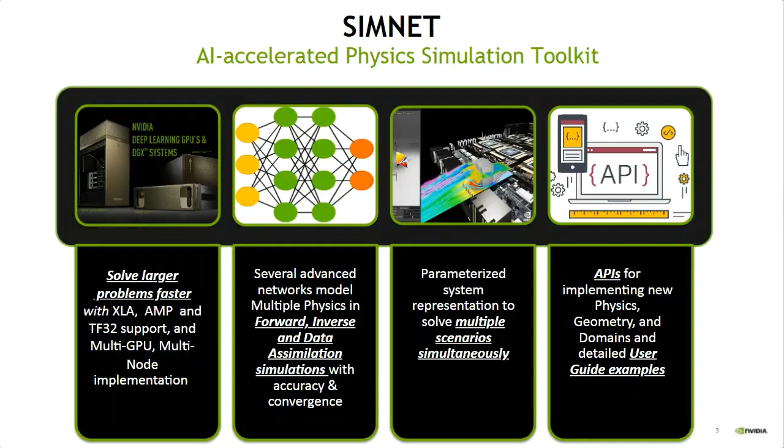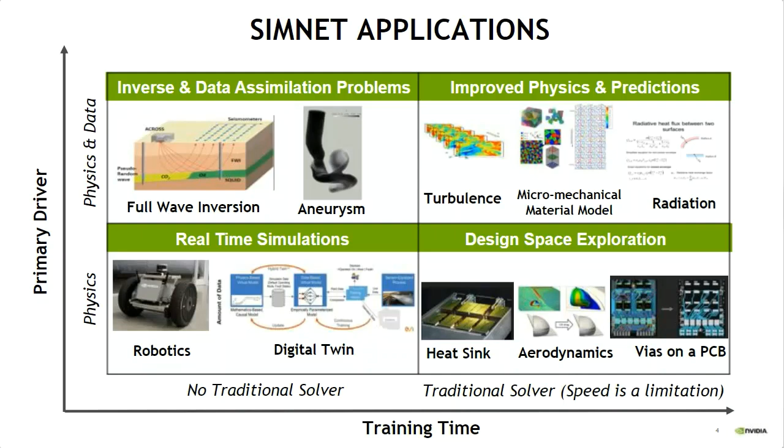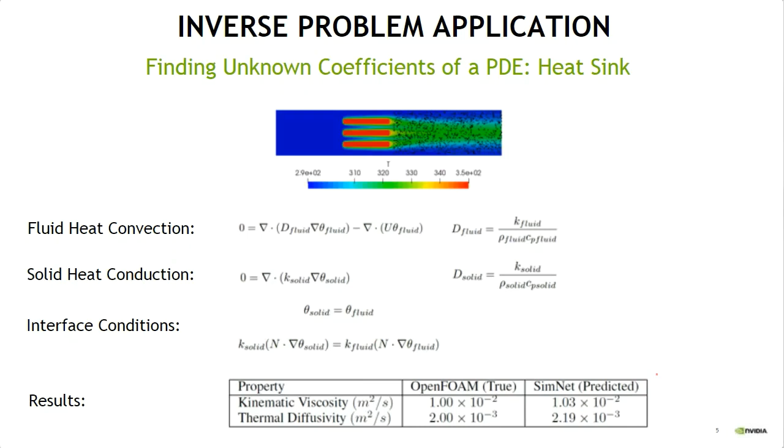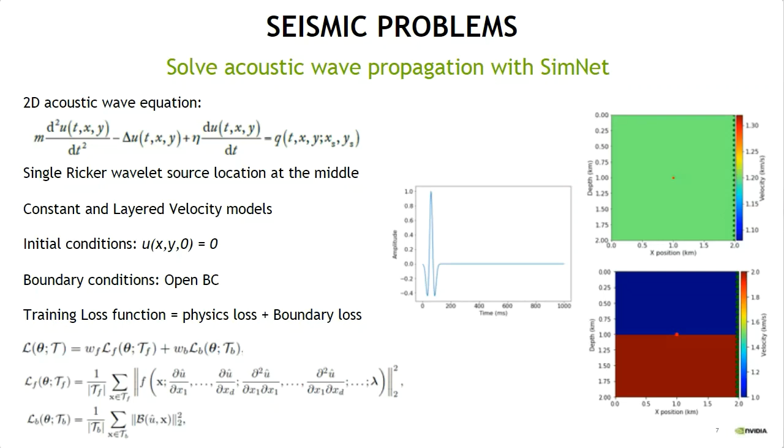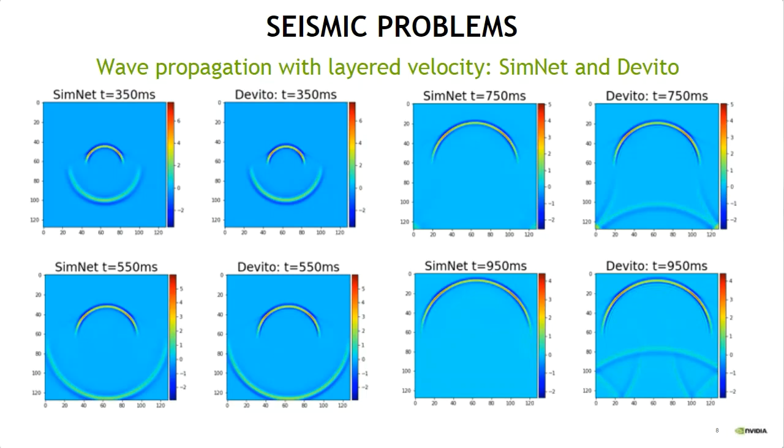For the layered velocity model, not only do the SimNet results compare well with the Devito solution at times 350 and 550 milliseconds, but also they do not show the reflection found in Devito results, which are unphysical and inconsistent with the imposed boundary conditions.

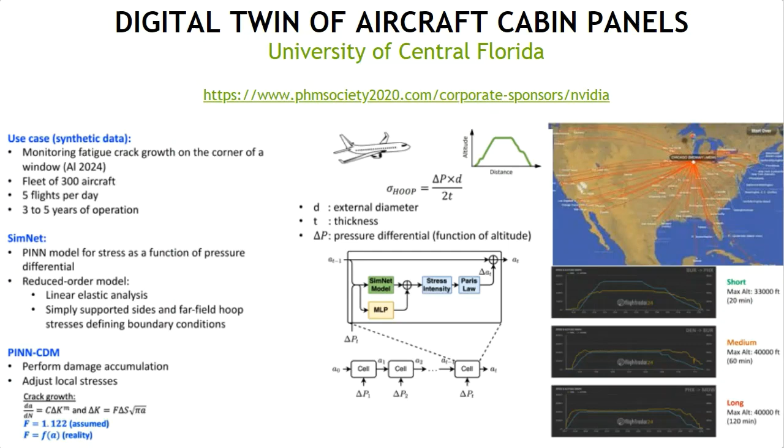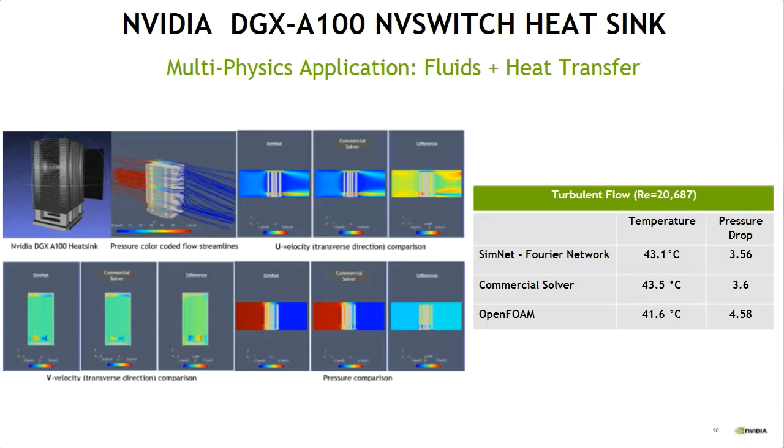Comparison of SimNet results for the pressure and velocity contours, as well as pressure drop and maximum temperature at the heat source, shows a good agreement with both OpenFOAM as well as the commercial electronic cooling software. SimNet trains on a parameterized geometry with multiple design variables in a single training run, thereby significantly accelerating design space exploration. In contrast, traditional solvers are limited to a single geometry simulation.

Once the training is complete, several geometry, material, or physical parameter combinations can be evaluated using inference as a post-processing step without solving the forward problem again. Such throughput enables more efficient design space exploration tasks for complex systems in science and engineering.

The neural network in this example consists of 10 variables with min, max, and median values in the range of these parameters. The OpenFOAM and commercial solver runs are on 12 CPU cores, dual 3.4 GHz Intel Xeon Gold, and SimNet runs on 8 V100 GPUs in the DGX-1. It can be seen that SimNet can solve the problem faster than the traditional solver by several orders of magnitude.

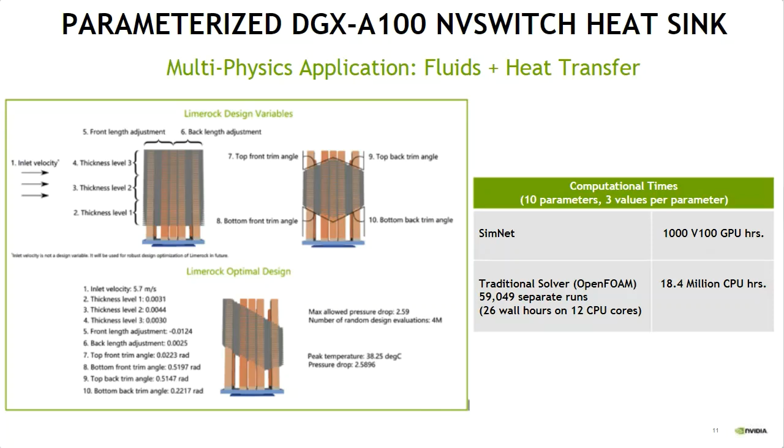Using FP32 precision, the A100 is about 1.5 times faster than the V100, but the speedup is over 3 when using TF32 precision. For parallel runs, both strong as well as weak scaling have been optimized.

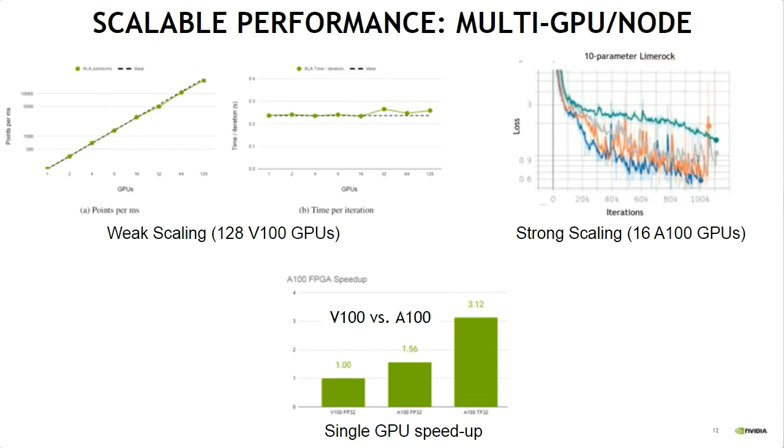All right, so SIMNET is designed to be a general purpose neural network differential equation solver. So what I'm going to talk about is some of the details behind what a neural network solver is. This is oftentimes referred to as physics-informed neural networks. And after that, I'm going to go over some of the key features of SIMNET that we hope will get people interested in it. And so I'm going to talk about the methodology of neural network solver in this very simple example problem of solving this differential equation.

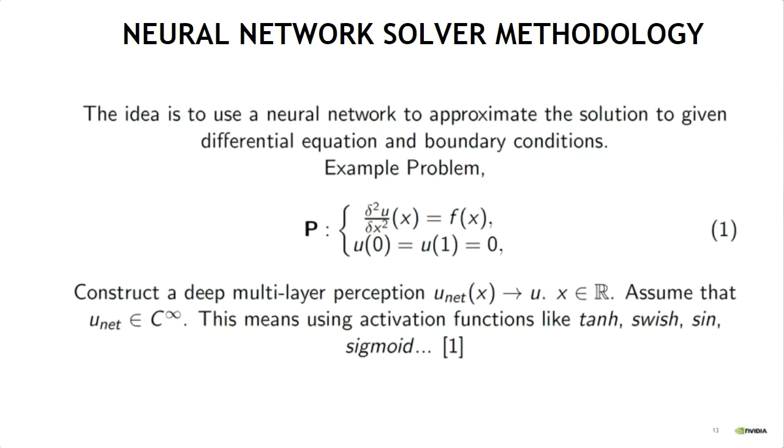So we have this differential equation we're trying to solve, and we have these two boundaries. And so we're going to construct a deep multi-layer perceptron neural network that's going to map this single value x to a value u. We're going to train this neural network so that it represents the solution to this differential equation. We're also going to construct this neural network with activation functions like tanh and swish so that the neural network is continuously differentiable. And I'll show why we need that in the next slide.

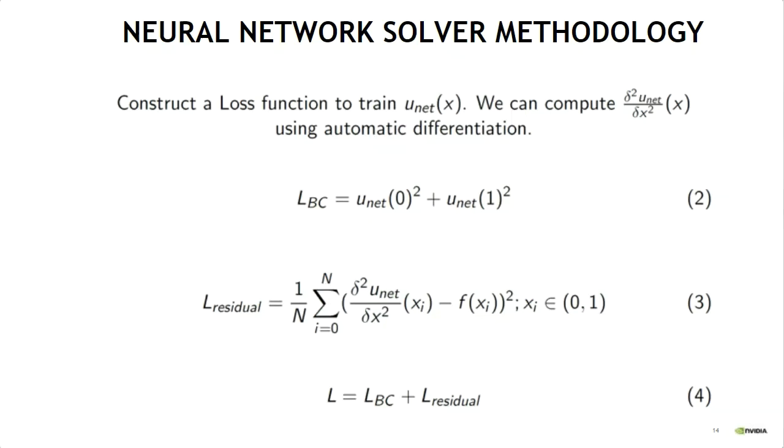We're going to add these losses together, and we're going to minimize this loss as much as possible. And if the neural network has minimized this loss sufficiently, the neural network itself will be our solution to the differential equation. And I'll note that we can compute these derivatives in this equation and the second order derivatives using automatic differentiation that's available in most neural network libraries today. All right, so this is just a very simple example. If we set the function f to be just 1, then we can use our neural network solver, and it solves it very well for this very simple problem.

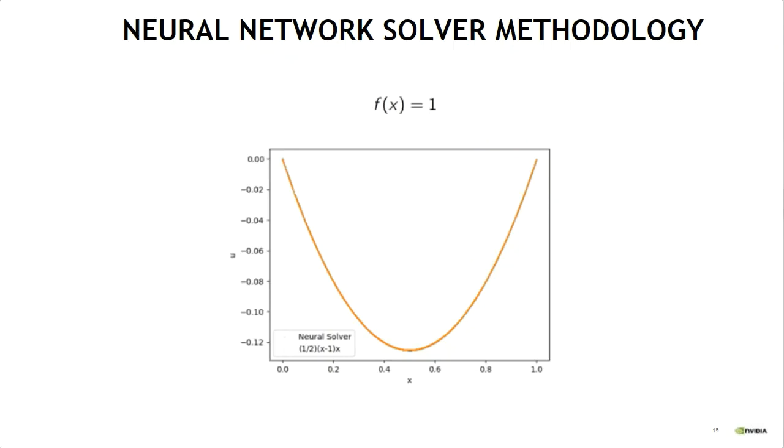There's some differences. This will scale the losses proportional to the area. This is actually kind of nice because it keeps things consistent across different problems. It also allows us to compute these integrals more efficiently with things like quasi-Monte Carlo sampling or sampling in certain regions with a higher frequency. But I bring this up because for the rest of the slides, I'll be showing this integral and the losses. All right.

So one of the key benefits of a neural network solver is being able to solve parameterized differential equations. And so I'm going to go over a really simple example of this with our previous example. So we're going to have the same differential equation we're trying to solve, but now we've parameterized the right boundary condition with this value L.

And we want to know the solution to this differential equation where we're varying this right boundary between 1 and 2. And so how we're going to do this is we're going to train a neural network. Before, the neural network was taking in that single value x and mapping it to u; now it's going to take in 2 values, x and L, and then it's going to map it onto u.

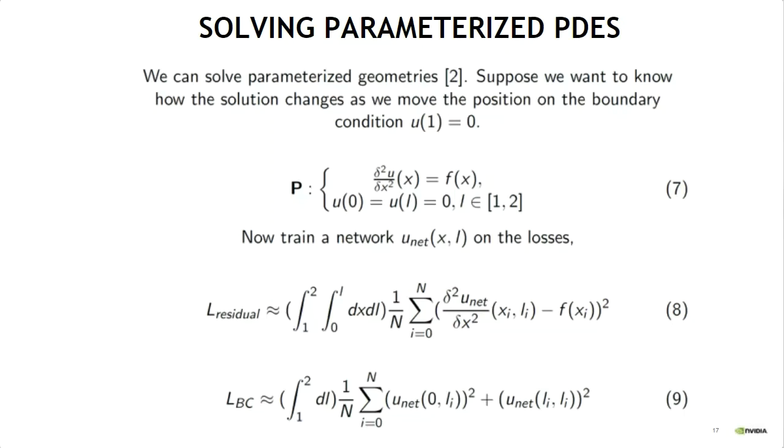So while this is a really simple example problem to illustrate how a neural network solver can solve parameterized problems, you can start to imagine how this can be a really powerful tool for a lot of different problems. You can solve parameterized partial differential equations, or in a lot of the examples that we have in our user guide, we're solving parameterized heat sinks, where we're varying the heat sink geometry in some ways, or the inlet speed of the channel and things like that.

So we can also solve inverse problems with the neural network solver. And so I'm going to go through an example of this. So suppose we have that same problem before, but now we have 100 random points between 0 and 1 where we know the true solution for u. So we know u true at 100 random points, and we want to determine the function f that is causing this solution to our differential equation.

So what we can do is we can train a neural network UNet like before, and we can also add in another neural network FNet, and FNet is going to approximate this function that we're trying to find out. We're trying to invert out this function. So like before, we're going to set up this loss function for the residual, and now f is coming from our FNet.

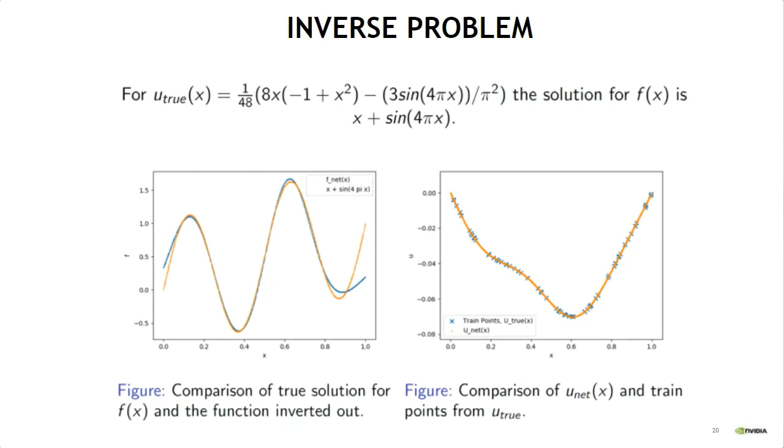So I just went over some of the basics behind a neural network solver and physics-informed neural networks. And so what I'm going to do now is talk about some of the key features of SimNet that we hope get users interested in trying it out. So SimNet is designed to be a general purpose differential equation solver. And so from a user's perspective, it's similar to a lot of other differential equation solvers that are out there. So we have tools to define your domain or geometry in different ways, and define your equations and boundary conditions that you're trying to solve for.

SimNet also has a model zoo of different neural network architectures from the literature that you can try out. We have some tools to visualize the results and monitor the convergence. We use TensorFlow, and you can visualize the results while training using TensorBoard. SimNet also generates VTU files that you can visualize in ParaView. And everything is built so that you can run it on GPUs and multi-node and multi-GPU machines. So whatever your system is, you should be able to run SimNet on it and take maximal advantage of the server and system you have.

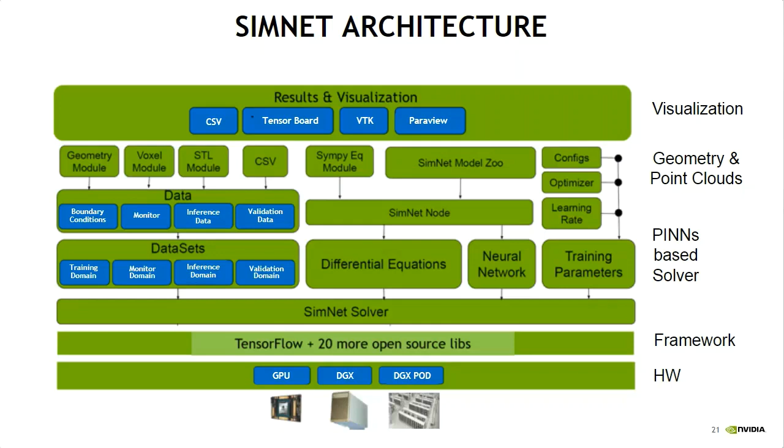So one of the key features of SIMNET is a fully parameterizable constructive solid geometry module. So using Boolean operations, you can use object primitives like the torus or rectangle and things like that to construct your geometry. It's fully parameterizable, so any quantity in it you can parameterize and give a range over.

So here's an example of a 3-fin heatsink that we've constructed where we parameterize the fin length and heights in different ways. And we solve the steady state flow over this heatsink with the conjugate heat transfer problem as well.

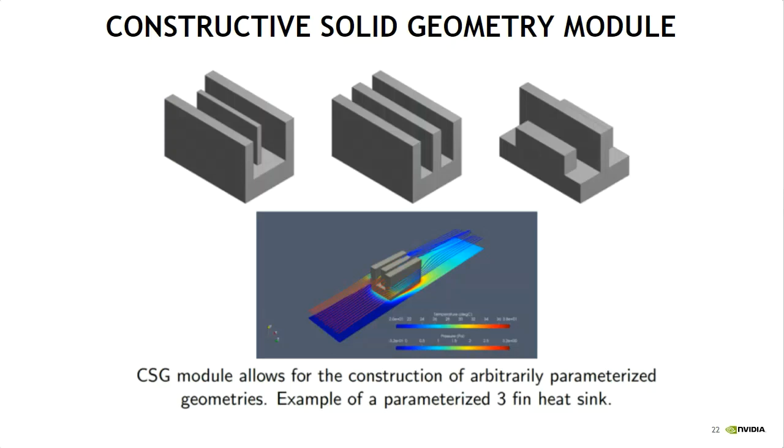SIMNET also contains a tessellated geometry module that allows you to work with complicated geometries defined as STL files. So here we have an example where we're solving the steady state flow in this aneurysm. This library is accelerated with ray tracing methods that are very efficient for generating some of the needed point clouds for training and things like that.

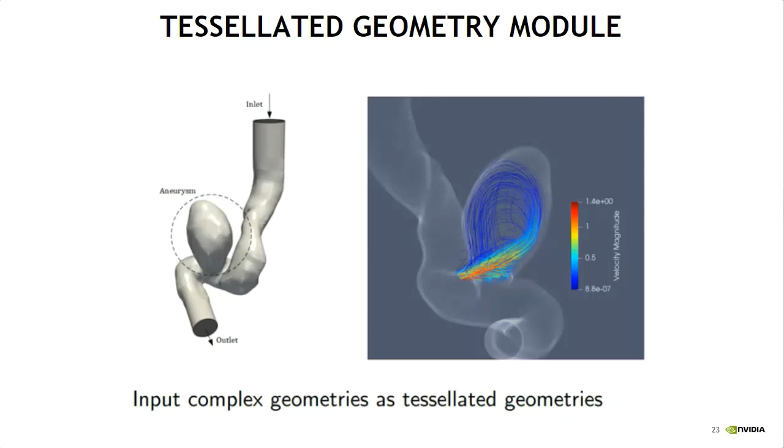SIMNET contains a model zoo of different neural network architectures to choose from. So there's a lot of literature right now on different neural networks you can choose. We've implemented a lot of the ones in the literature, as well as a few in-house networks that we've developed. Some of them can give substantial speed improvements in convergence of your problem.